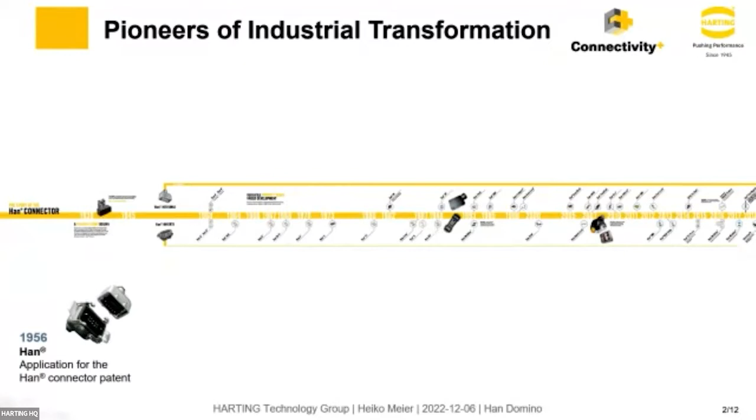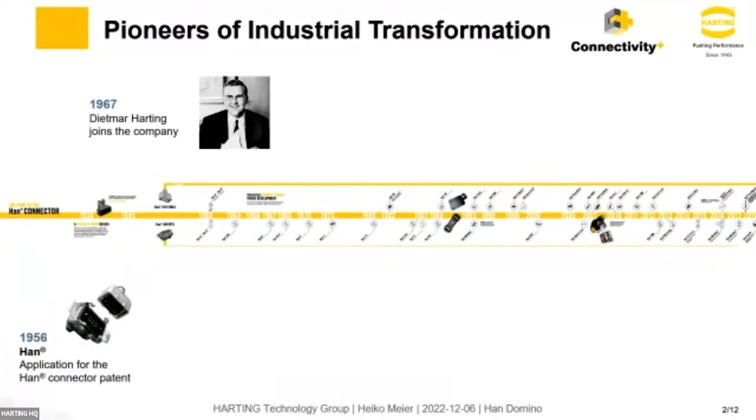In the 1950s, Harting developed the Han connectors, and Harting applied at that time already for a patent. A few years later, Dietmar Harting joined the company and forced several innovative things. For example, one milestone was the development of the Han-Com connector. Han-Com means combined connectors, and this was a great market success.

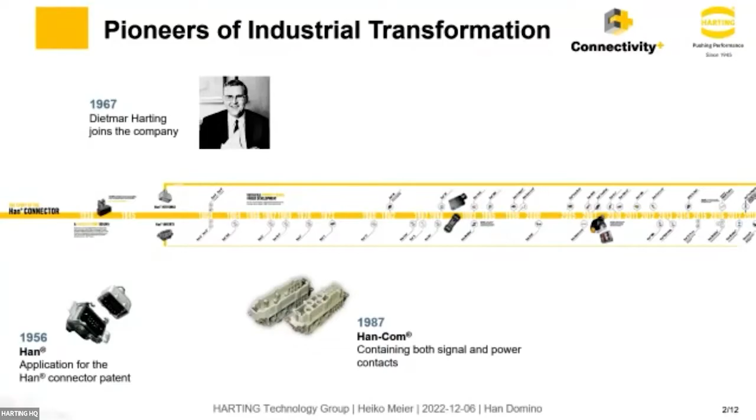Therefore, we noticed that many customers had a lot of advantages by combining those connectors. But we also noticed that it's nearly impossible to create a combined connector for each individual application. Therefore, Harting created a new solution: the Han-Modular solution, so that the customer can combine by himself the connectors he needs in his application.

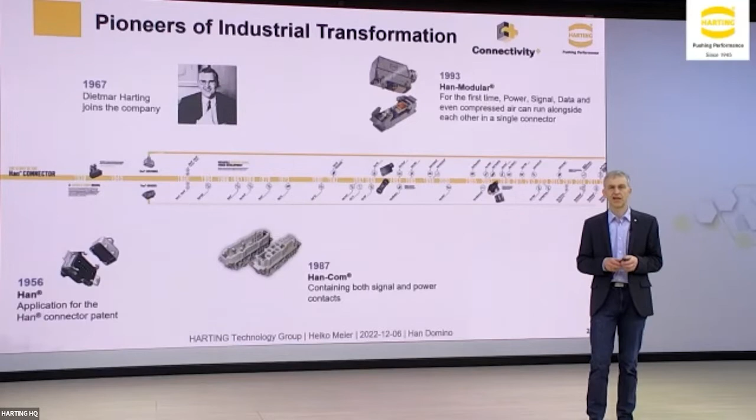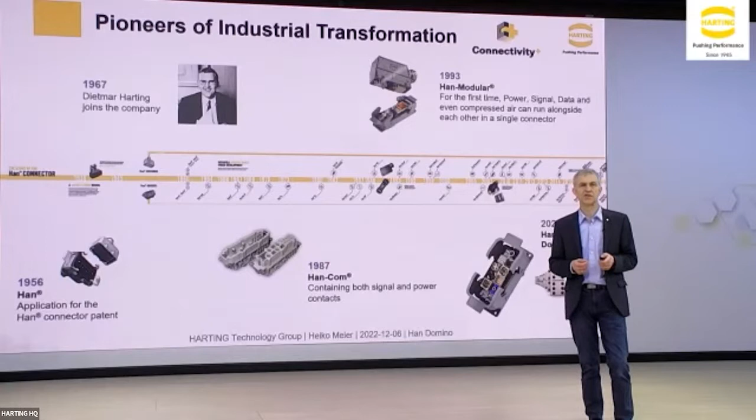And now we got to the next milestone in the historical development, the Han Domino modules. Later on, I will show you some more details about these Domino modules. But before we start with those details, I want to go a step back to explain the industrial connectors, the Domino, and the modular connectors.

Han-Modular, as you can see here, is the consequent enhancement of the worldwide well-known rectangular Han connectors. The key feature is to combine several different connectors in one Han-Modular connector, which can solve a lot of issues in your application. The following video gives you an impression of this.

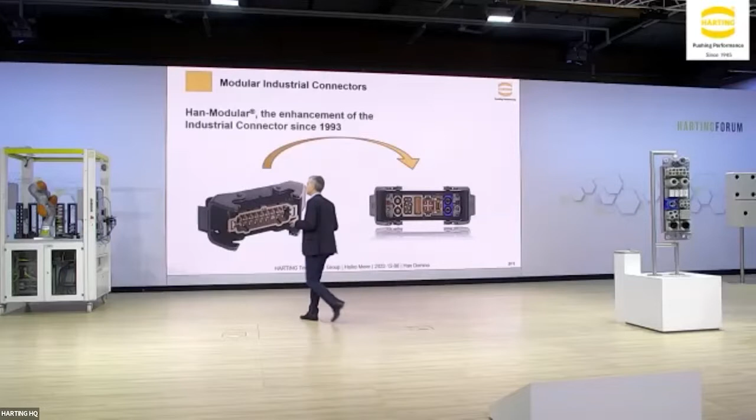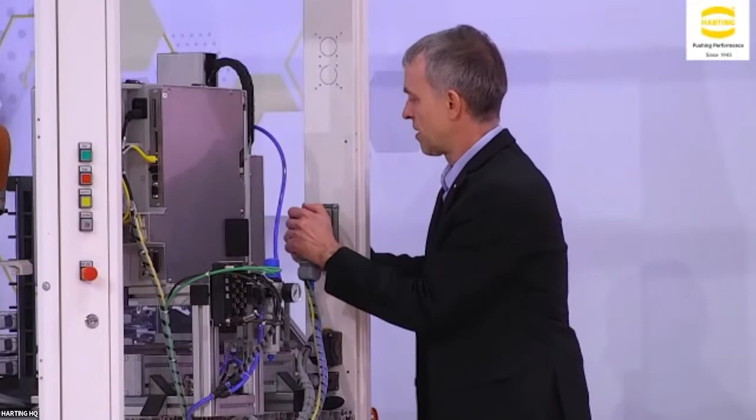Okay, let's take a look at a real application. We have prepared a machine equipped with several parts. Here's a handling device connected via an industrial connector. As you can see, this Han-Modular connector is equipped with power, signal, data, and also pneumatic - an ideal combination for Han-Modular. You just have to plug in, and then the device is connected. This saves space and time for our customers. But don't worry, the standard monoblock connector is still available and can be used according to our customers' needs.

In the following video, you will see how it can be done at your site.

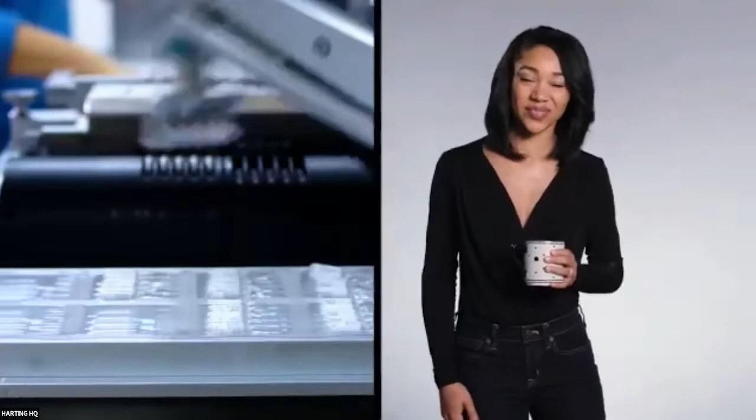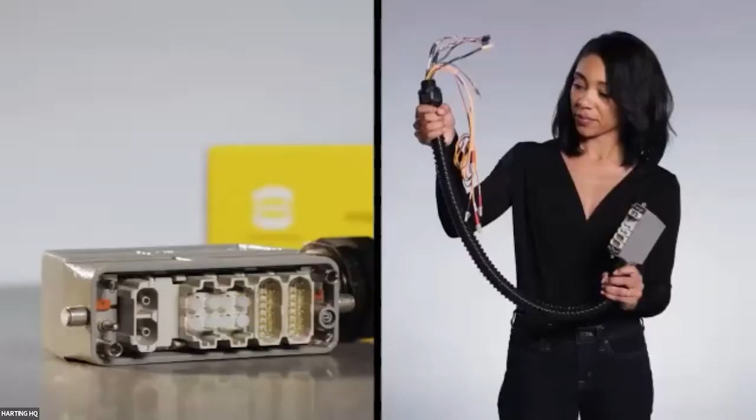Jack and Kim are both designing industrial robots that build products people use every day. Jack is designing a large robot used on a car manufacturing line; he needs a connector to provide the main power to the robot from the power supply. Kim is designing a small robot that packages different goods; the robot is moved frequently, so she needs one connector for different transmission types, such as power and controls, to allow the robot to function. For Jack, a standard Han power connector is perfect. Kim's solution is the Han-Modular, combining multiple transmission types into one connector - finding the right connectivity solution for single transmission and multi-transmission connection points.

So you can see both is possible. Sometimes customers are asking, is this allowed, to combine several different connectors into one connector? And the answer is clearly yes, of course.

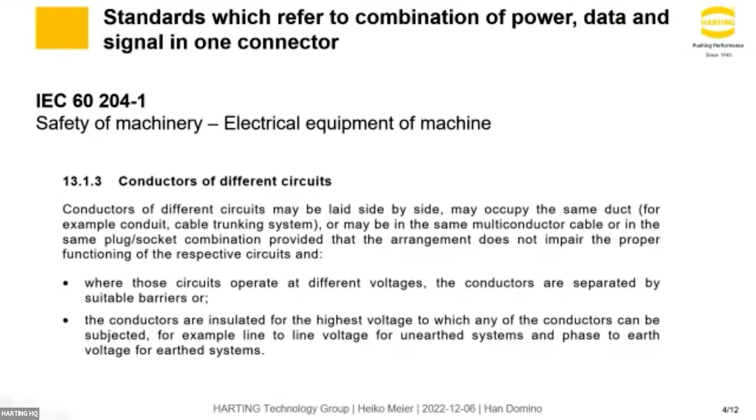It's specified in the most important machinery spec, the IEC 60204-1. There it is stated that it is allowed if the electrical design is designed according to the highest voltage. And of course, this is done within the Han-Modular systems. So officially, the customers can combine it.

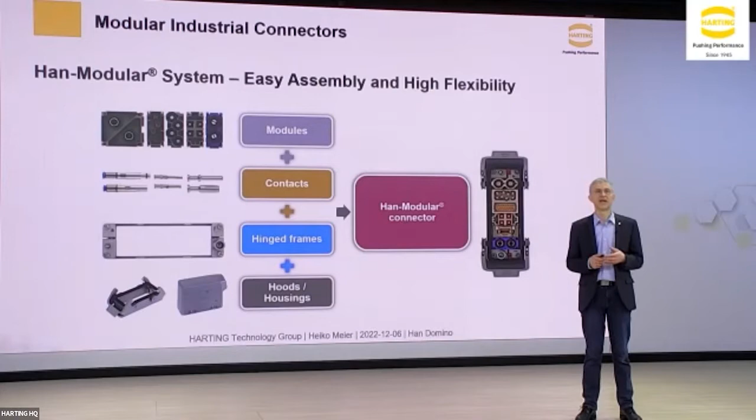If we take a more detailed look at how a modular connector is working, you see that we have several components: modules, frames, contacts, hoods and housings. Several things can be combined together according to different needs. It's important that our customers can use existing parts - existing contacts, hoods and housings stay the same, so they don't need to be qualified again.

Let's take a look at the most important part, the modules itself. We already have more than 100 modules for different applications. We have modules for signal, for power up to 300 amp, special solutions for high voltage, pneumatic, fiber optic, as well as shielded and coax solutions. Also a big bunch of different data modules are available. So we have a lot of different modules, nearly a perfect solution for each individual application.

But we do also develop new things step by step. Some years ago I thought now we have everything, but it's the other way around. The more modules we develop, the more new applications we can enter, so that we get new input from our customers. And new input means that we do also develop new solutions according to this input.

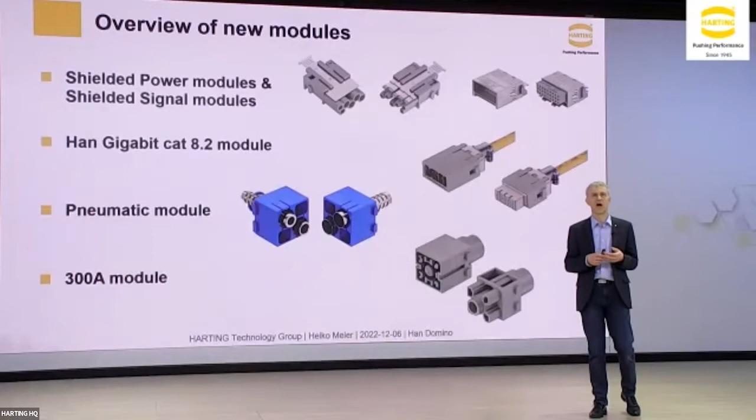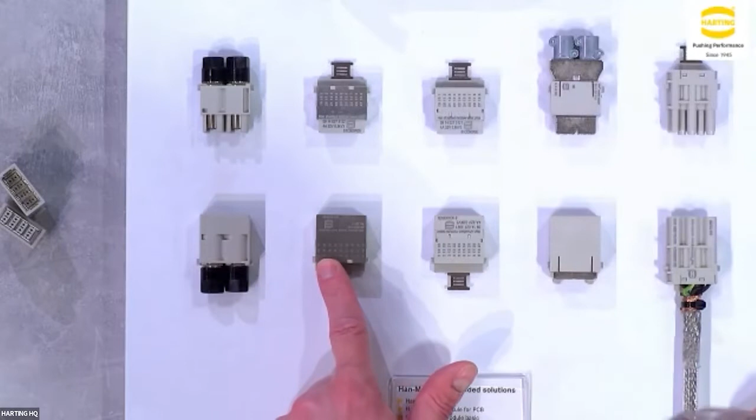Here is the connector equipped with different modules. Here are shielded modules - this is a shielding which is placed on the side of the modules and around the module. So this is a shielded signal module in different versions. But we also have here a shielded power module, meaning in this case for motors: 3 plus PE plus additional signals for brake or heat measurement, something like this. So the customer is able to use shielded power cables in the connector modules side by side with other solutions.

We also have developed power modules here. This is, for example, a 300 amp module, which can be placed on a DIN rail and in different solutions. Here, for example, is a docking connector. The docking connector can be equipped in drawers, in cabinets, where customers need to plug in different devices, something like this. But of course we also have them with crimp or axial screw termination. This is often used in energy systems.

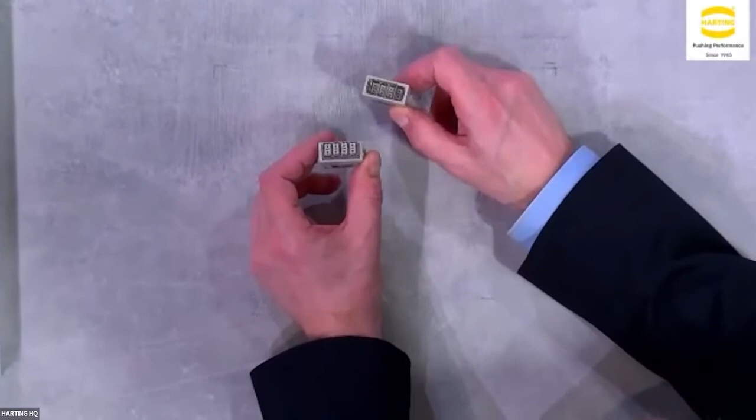Finally, I want to tell you some words about the new gigabit Cat 8 module. It's just launched some weeks ago. It's more or less very similar to the existing gigabit Cat6 module, but the inner shape is optimized to fulfill the requirements up to Cat 8.2. Cat 8.2 means theoretical 40 gigabit data transmission, but the spec is defined in this way that the limit is maximum 2 connectors and cable lengths up to 30 meters. But this module is not only for those high data rates.

Another advantage is, for example, if you use Cat6 applications for 10 gigabits and combine it with this module, you have much more safety reserves. So you can be sure, even if the assembly is not 100% perfect, you still reach the performance for Cat6 without any problems. Another important point is, for example, in the railway industry, our customers want to install the best available solution because their system has to work for many, many years, and they don't want to exchange the installations after 5 years. So with those gigabit Cat8 modules, you're on the safe side that you fulfill the highest requirements for the next years.

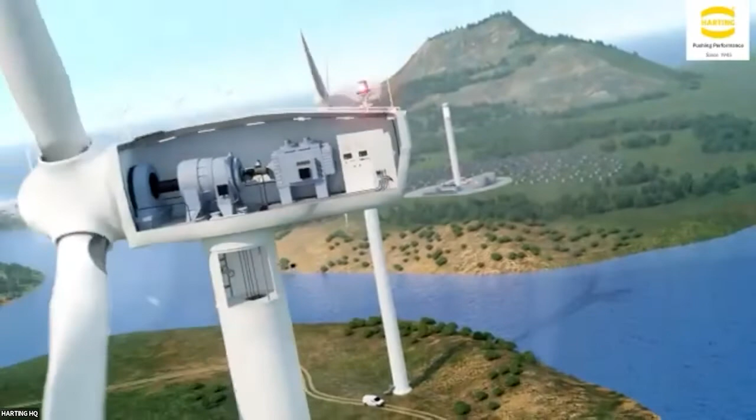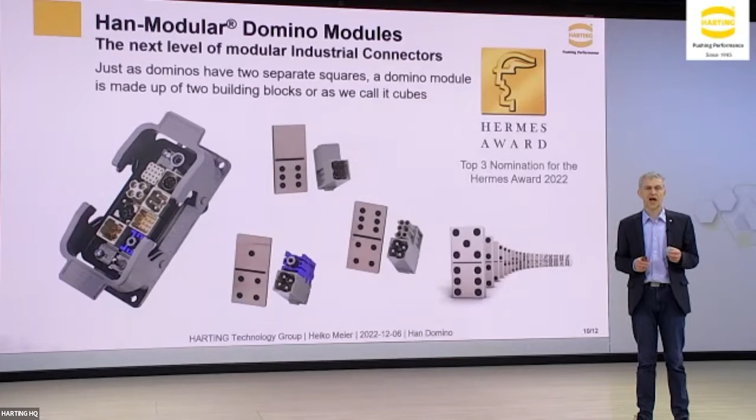So the customer can pick one side with pneumatic and the other side with power, for example, or power with signal, or power with data. So all those parts can be combined according to what you need. It's also possible to combine a male side with a female side. You just have to take care that you use the right parts, so all the modules are coded.

Right now I have the same parts here in my hands in 2 different versions. Here is a version with a small coding pin, and another version with a big coding pin, and you can press them easily together, and that's it. You also can combine male and female into one module. So highest flexibility to combine everything you need.

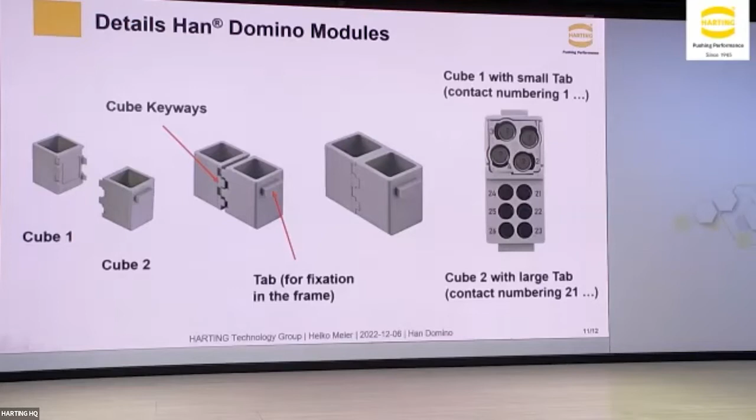So on the PowerPoint slide, on the next one, I can show you here on the big screen how it is working. You will see that we have here the fixing tabs and the cube keyways to combine them. So it's quite easy, you just can do it very easily. As soon as you have installed or assembled them, you can install them into the hinged frame.

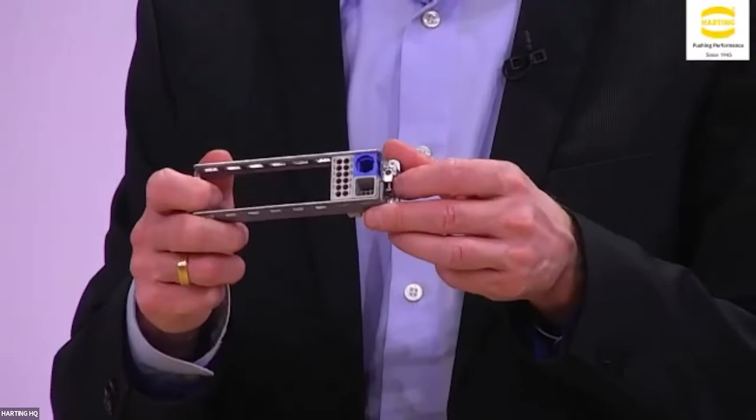Also, it's possible to combine them side by side with power modules or existing standard modules from the Han-Modular portfolio. Here's a demonstrator where you can see it. The Domino modules are equipped here on different positions, side by side with the existing power modules or signal modules. In this case, we've also placed the gigabit Cat8 module in this demonstrator. So you can see you can combine everything into one connector according to your needs.

Yeah, this is quite easy and simple, and we will show you a short video of how to combine it from a different point of view.

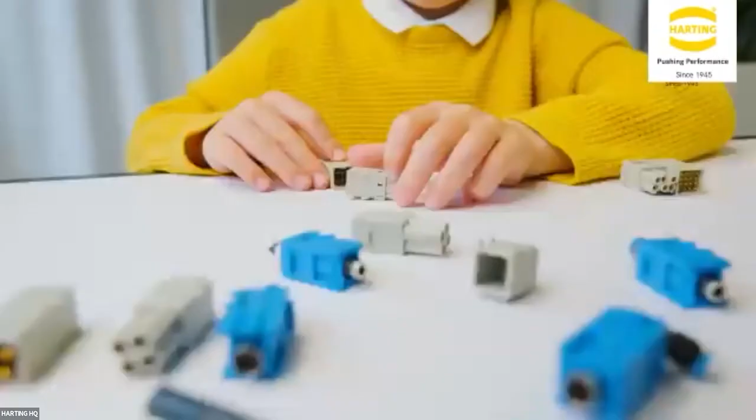Yeah, I think it was quite easy how to do this, how you can combine it. There we also have some supporting tools, and therefore I want to hand over to Yannick. Yannick, please enter the stage, and then you can explain how the configurator is working.

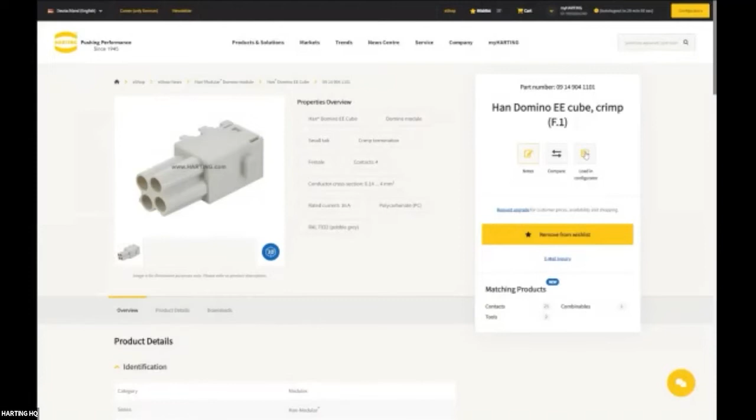You can also filter by criteria like gold-plated contacts so that you reach the suitable and matching contacts according to your Domino modules. You have the possibility to add the contacts to your wish list, so all of our products are involved and combined with our digital services.

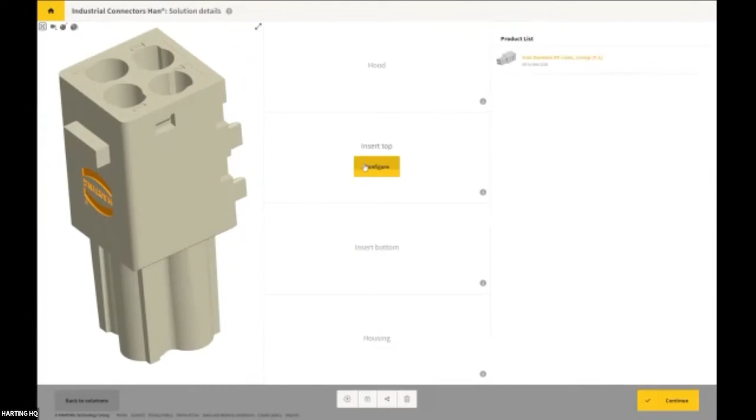We can also directly jump to the configurator. As you can see, the Domino cube is already selected. We have the possibility for our 3D parts, as well as to start our configurator and configuration according to your desired and everyday needs. To start the insert top part, we are going to divide our slot place into 2 further levels.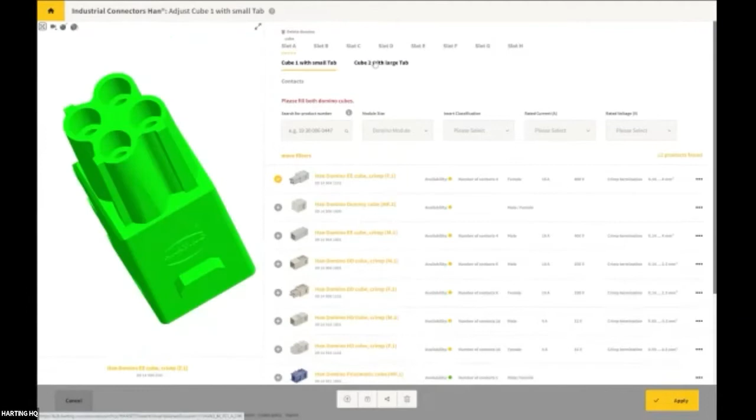As one level, we have cube 1 with a small tab. On the other side, the mating part, we have cube 2 with a large tab. We also have on every level the different 3D models, so you can always have a look and visualize your selected components.

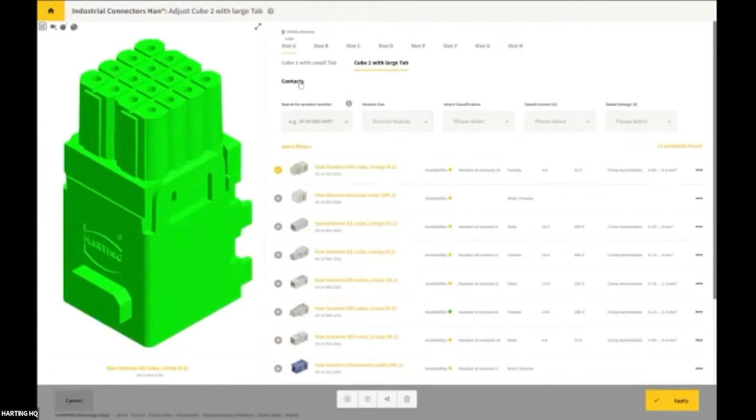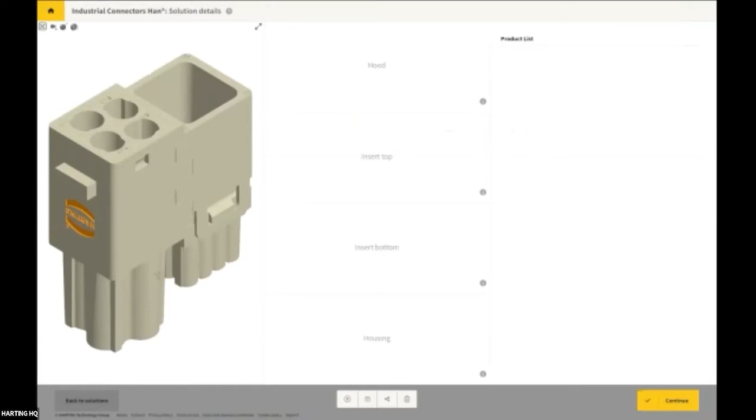So we are going to add all the selected components directly to the configuration. And as you can see, we have the fully placed Domino cubes together in one overview. The next steps are to choose the right housings or other connectors that could also be placed in the configuration. Now I would like to head over to the beginning of the configurator.

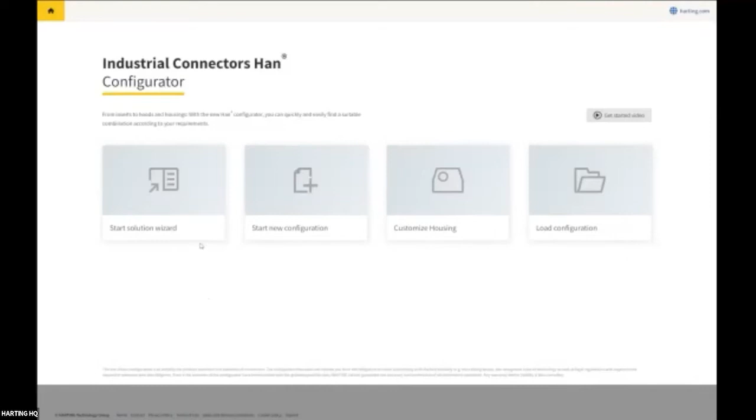Here you have the possibility to start with the solution wizard, to start a new configuration without any selection solutions. You also have the possibility to customize your housing according to your needs, or even load a configuration that has already been configured. For this, I would like to talk about the solution wizard based on some requirements according to our application.

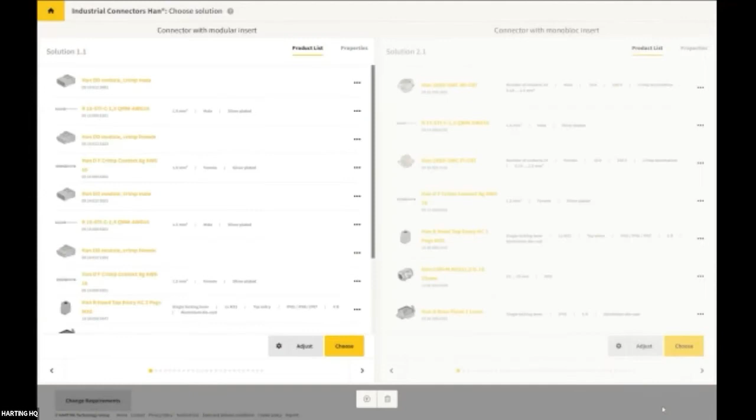We can enter, for example, 24 contacts, and our application needs 3 amps as rated current and 250 volts as rated voltage. According to the solution wizard, we are going to receive a full connection and a full interface with our components. On the right side, we have the solutions with the monoblocks.

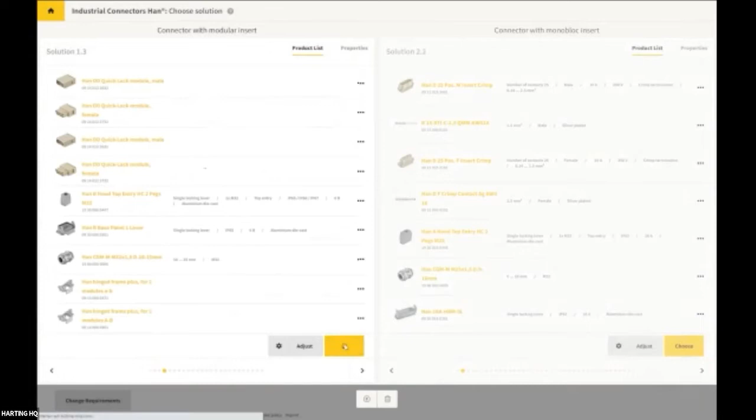And on the left side, we have a connector with a modular insert. We can also switch between the single solutions, adjust the configuration, or choose it and have a closer look at the solution wizard.

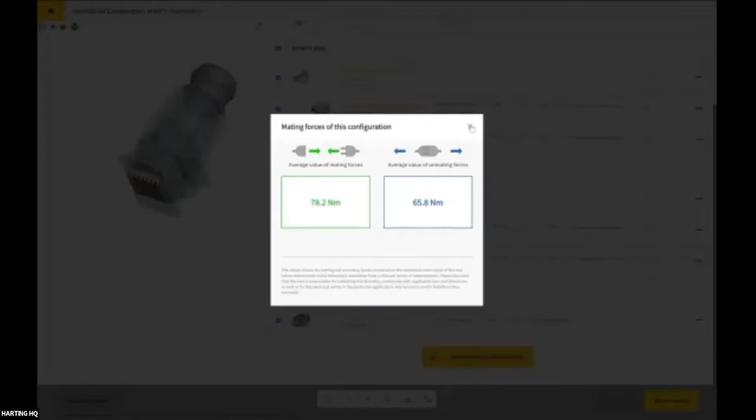We are also able to get the mating forces of this configuration with a new tool. We can also save the configuration to forward the ID, for example for the development or purchasing department, or we can also load the ID with our suitable services.

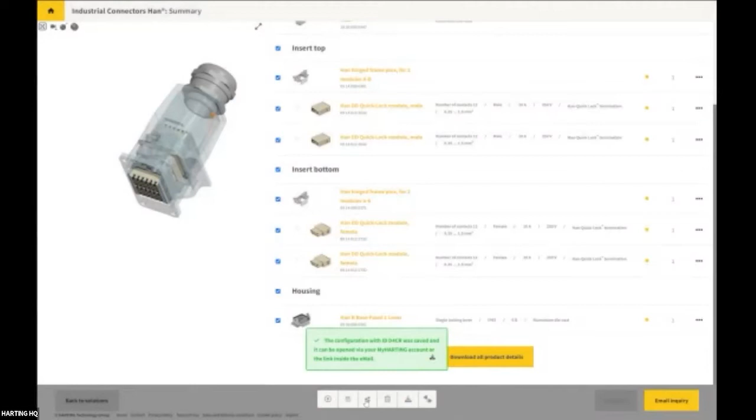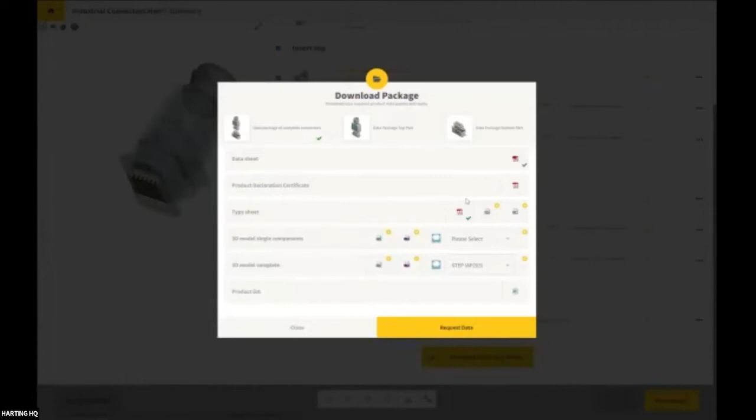As you can see, we are going to get an ID that could be reloaded or forwarded to other employees or to other persons. Here we have the possibility to download a full package of data, choosing between data sheets, engineering data, 3D models, and every kind of digital data we need for our development phase. We can request the whole download package and receive an email with a suitable link that includes the download package for our references.

After choosing to receive the email, we get a hint that an automatically generated email will be produced.

Now I would like to talk about the product data manager. It can be reached through our website. It includes a list where the main thought is to get a full data package according to several articles that have to be added to the product data manager.

If you add different kinds of articles and have a wrong article number, you're going to receive a hint that this article could not be found. But it's very easy to copy paste, for example from an Excel sheet, the different kinds of articles that we would like to receive more information about.

But we also have the possibility to import an Excel file, import different kinds of articles from our cart, or even import directly from our wish list. So all of the different digital services are integrated and can be combined.

If we have, for example, a list in our wish list and would like to start from this overview, we select different kinds of articles and choose this button so the articles are added to the list. We jump directly to the product data manager and see that 4 more articles are added to our product data manager.

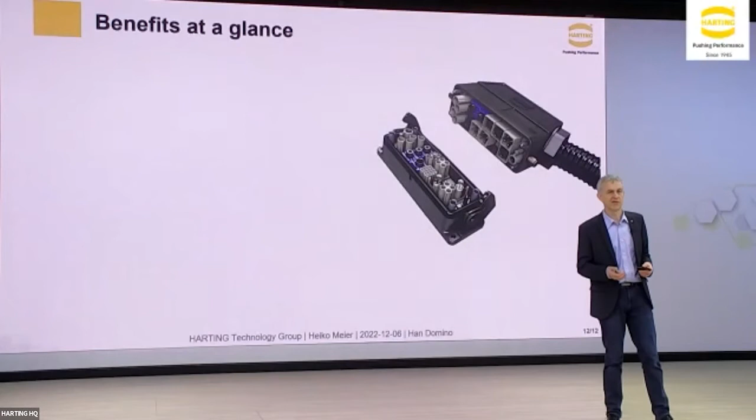Finally, I want to summarize these things and explain the benefits of the modular and especially the Domino solutions in a bit more detail. So of course, the most important thing is that with the use of the Domino modules, you can save space in your application.

I've already spoken to several customers during the last weeks. We presented the Domino solution at the SPS fair in Nuremberg, also at Electronica in Munich, and got a lot of positive feedback from really highly interested customers who do not have enough space to combine all those connectors into one. With the help of the Domino module, they could reduce the size more than before and assemble the connector solution into their space. So space saving is one of the most important features in this case.

And of course another important point is the flexibility. You can design the connector according to your need. You don't need to implement things which are not necessary. You can just put in the connector part you need.

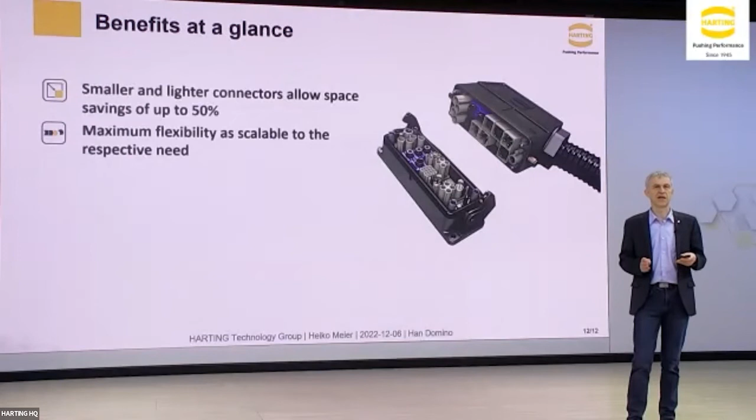It's important to reduce downtimes at the customer side by using just one connector instead of several. This is the main idea of the Han-Modular system, but with the use of Domino, you can implement even more connectivity into one connector, which may help you reduce another connector and reduce downtimes of your machines.

Another important point is that you don't need to qualify a complete new solution. You can still use the same existing parts as before. The modular frames are still the same, so the system overall is already approved at your site. The hoods, housings, and contacts - nothing new.

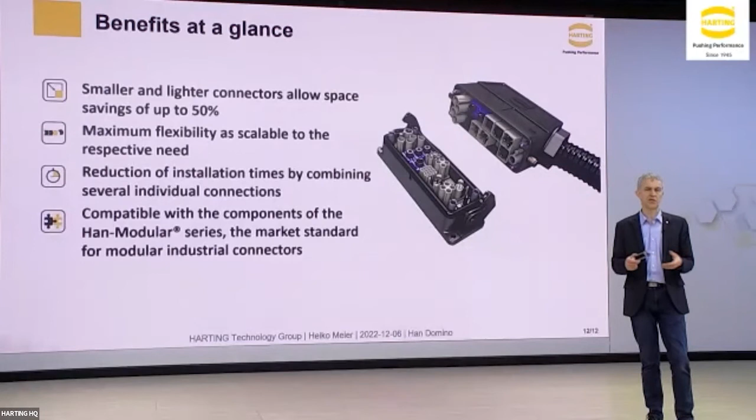Just the modules are designed in a bit different way, so that you have two halves which can be combined according to your need, and then you just have a new module which can be placed side by side with the other modules. Simple and easy, and the same process already known by your workers.

Finally, this is also about sustainability through consistent modularization, so that you don't need to approve completely new things, meaning you have a sustainable solution. But of course, the most important point is that you reduce space and increase flexibility with these Domino modules. So that's it for the explanation on the Domino, the modular part, and the digital services.